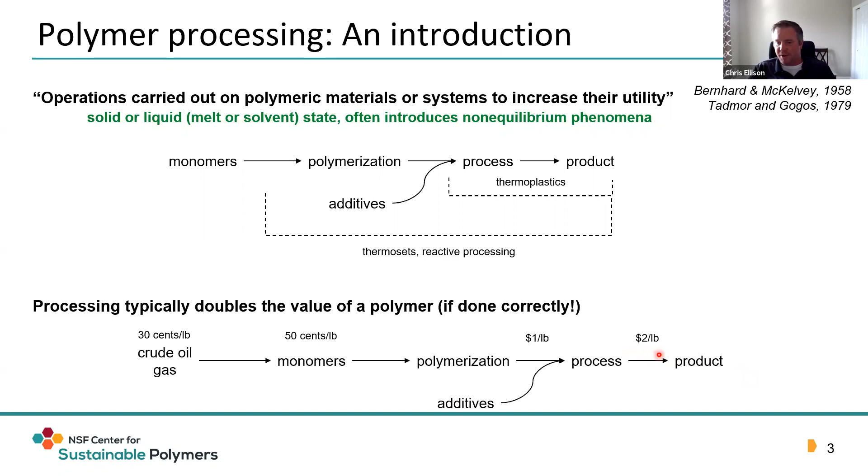Below, I'm just showing the flow from cradle to grave, so to speak, or crude oil and gas entering at the beginning. Of course, in the Center for Sustainable Polymers, we hope that would be biomass or sustainable materials, and then finishing at product. You can see it goes from $1 a pound to $2 a pound by way of the process. The process can be pretty complicated.

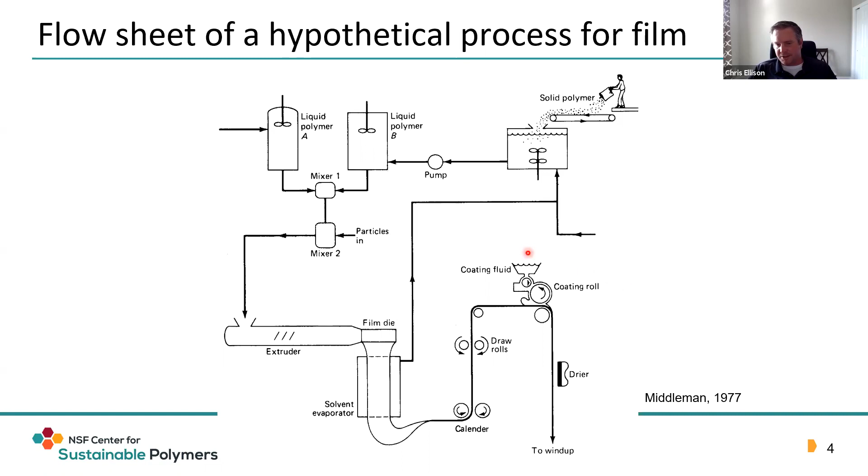Here I'm just showing a flow sheet of a hypothetical process for film. Really the only takeaway I'd like you to have here is that the process is more complicated than the single units that we'll show you today, and you really need to think about it in terms of all the unit operations. Here I'm showing a film process just as an example. Okay, next slide.

Polymers are anisotropic, and so this is typically exploited through processing. Because they're long chain molecules and have covalent bonds, they can be aligned in the flow, and that alignment in the flow can impart unique properties that can compete with more conventional materials.

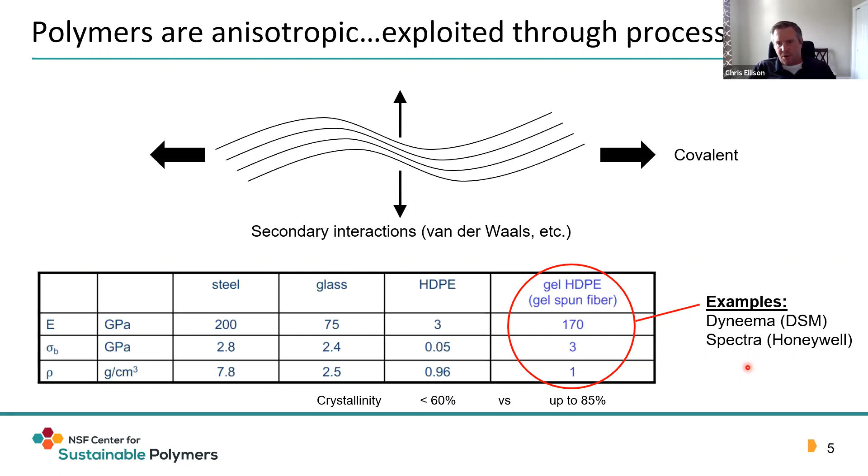However, if you process it by gel spun fiber process, you can actually make fibers that are competitive with steel, but have almost 8 times lower density. This is a result of alignment of polymer chains. It's sold as several different commercial products, one by DSM called Dyneema, and the other by Honeywell called Spectra. So the role of the material in the process is actually quite important in defining the final properties.

One of the ways you might think about how materials are intertwined with the process is to think about relevant timescales. Of course, materials have intrinsic material timescales. These might be related to things like the relaxation time, or the crystallization kinetics. And these are dictated by things like molecular weight distribution, branches, physical aging, et cetera.

But you have to think about those material timescales and how they work with the process, which come from the mechanical history, the flow intensity timescale, which can be different depending on the process you're using, and then also the thermal history. Thermal history in particular is important by way of how quench rates may control internal stress in the system, or the crystallization kinetics, and ultimately the crystal content.

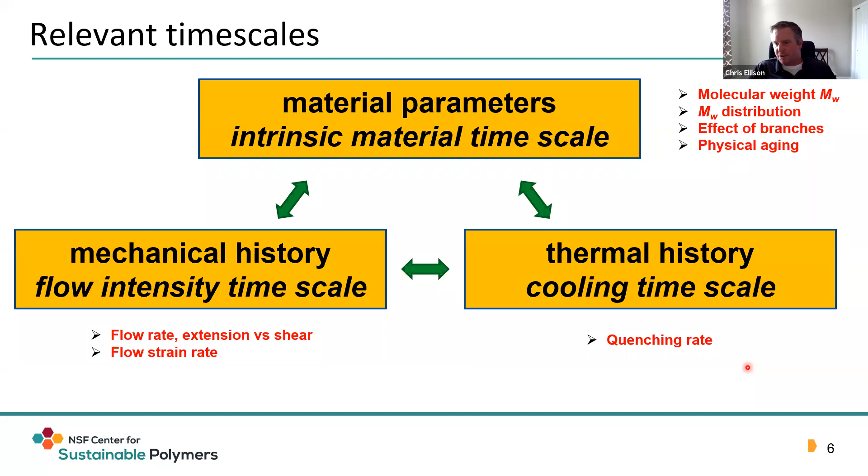So these 3 timescales are really important. Just to show a few examples of this, I'd like to focus on the rate of flow and how it can affect the way in which a material behaves.

I'd just like to point out that measuring the rheology or the viscosity of these systems over such a wide shear rate range typically requires using several different types of rheometers: rotational rheometry at low shear rates, and then capillary rheometry at high shear rates. So rate of flow matters substantially.

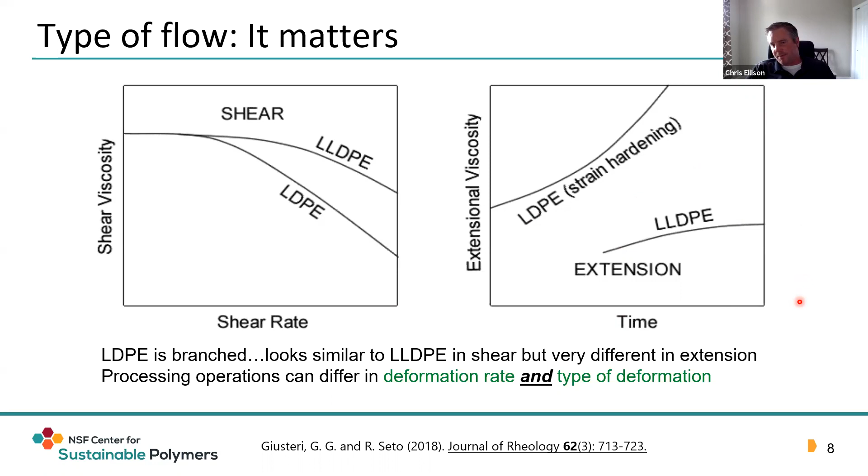However, if you look at the extensional viscosity, which is a different type of flow, the LLDPE doesn't exhibit much extensional strain hardening, while LDPE strain hardens substantially. The reason for this is LDPE is highly branched. It looks similar to LLDPE in shear, but it's very different in extension. And this all comes from 2 polymers that are essentially all carbon and hydrogen.

So keep in mind that processing operations can differ in both deformation rate and the type of deformation. Here's an example where both the type of deformation and deformation rate differ in a single process. It's not as if you take one process and it has one type of shear and one type of shear rate. It can actually exhibit multiple types.

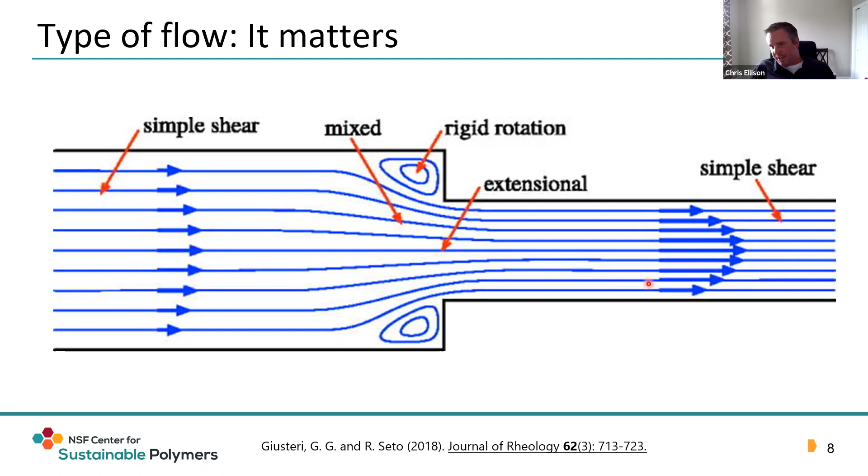This shows the streamlines of the fluid, a polymer melt let's say, and the size of the arrows indicates the velocity of the flow. Essentially you have a large tube going to a small tube. Where this contraction happens, there's a significant amount of extensional flow or mixed shear and extensional flow. Whereas at both ends of this picture, you typically just have simple shear and roughly parabolic velocity profiles. So this is a very simple flow, but it has a very complicated type of shear rate and type of deformation.

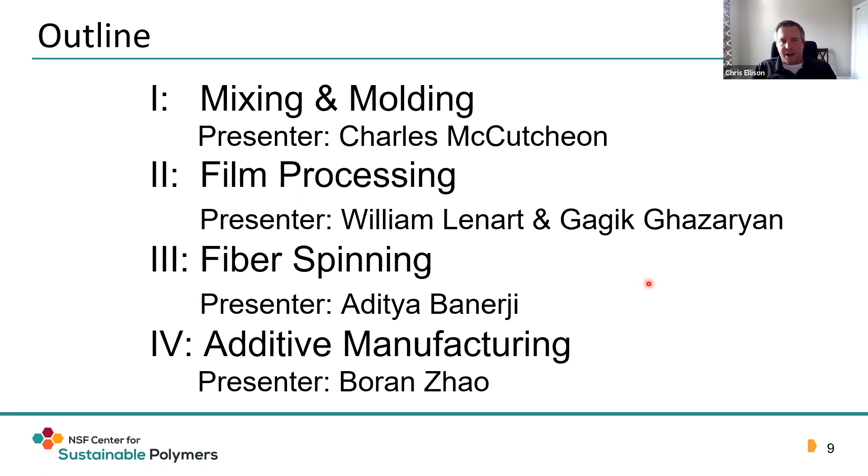One more thing I'd like to address at the beginning is that for all the mixers we will discuss, they can be used to mix polymer additive and polymer filler type blends.

Since this is a batch process, one disadvantage is that the material after mixing is a little difficult to recover.

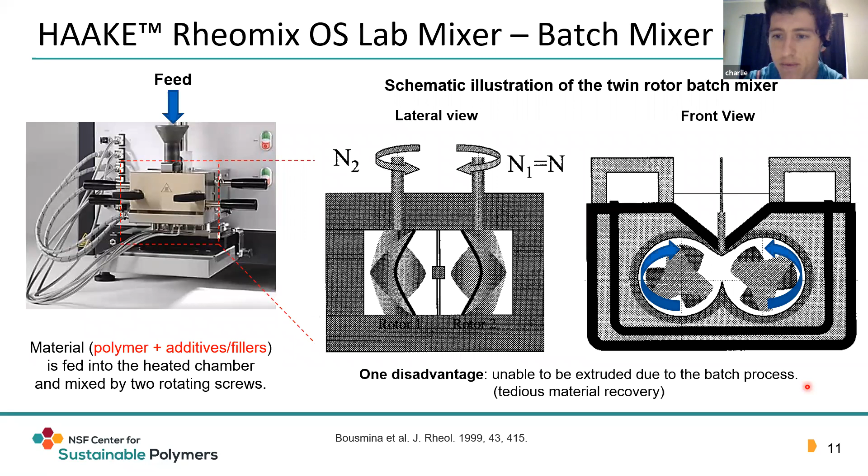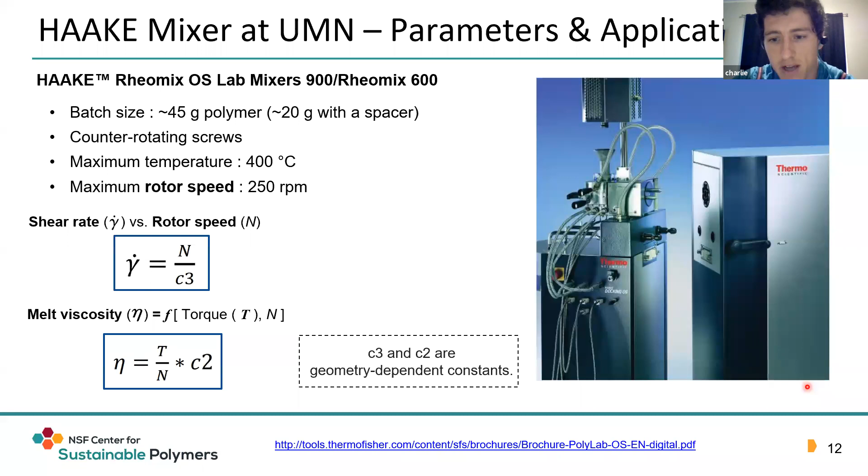The specific HAAKE mixer we have at the U of M is a HAAKE Rheomix OS Lab Mixer 900. The batch size is about 45 grams, or you can do a smaller batch size of about 20 grams with a spacer. You can do in situ measurements while mixing, such as the shear rate, which is proportional to the rotor speed, and the melt viscosity, which can be measured from the torque and rotor speed.

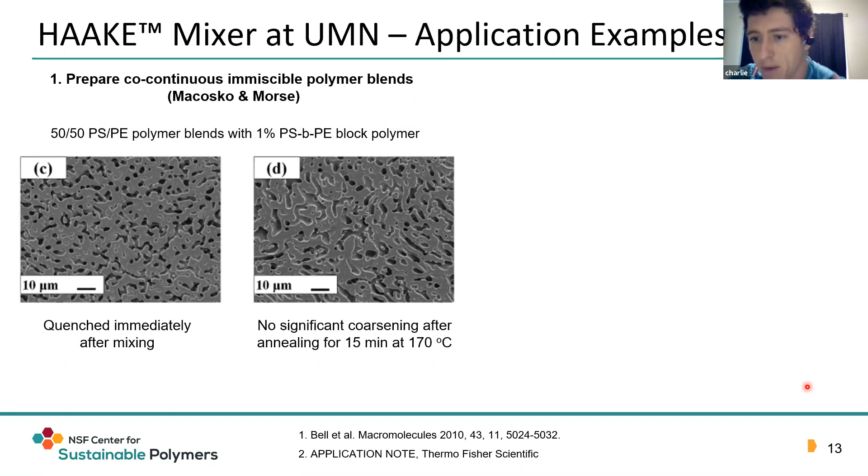An example of research that used the HAAKE at the U of M was done by the Macosko and Morse group, who used it to prepare polymer blends, co-continuous blends specifically. They added a block copolymer which stabilized the blend, and you can see the results here.

Another example with the HAAKE mixer is using a proper attachment, when we don't currently have one purchased, to measure other properties in situ during melt mixing. Here we measured the electrical conductivity, which is monitored by the addition of carbon black to make a composite, as one example.

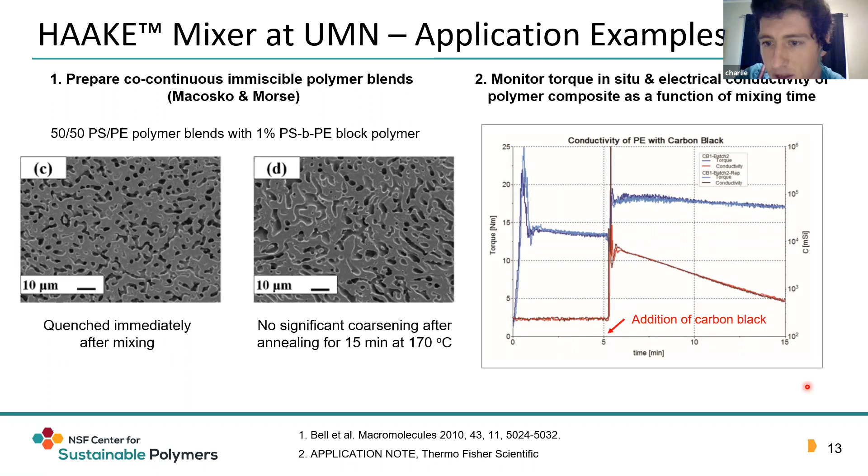Next we'll talk about the twin screw extruder, which is a continuous mixer, while the HAAKE was a batch mixer. Again you have a feed for polymer, fillers, and additives, then an extruder, a heating block, a die, and once the filament comes out of the die, it can then be pelletized if you would like.

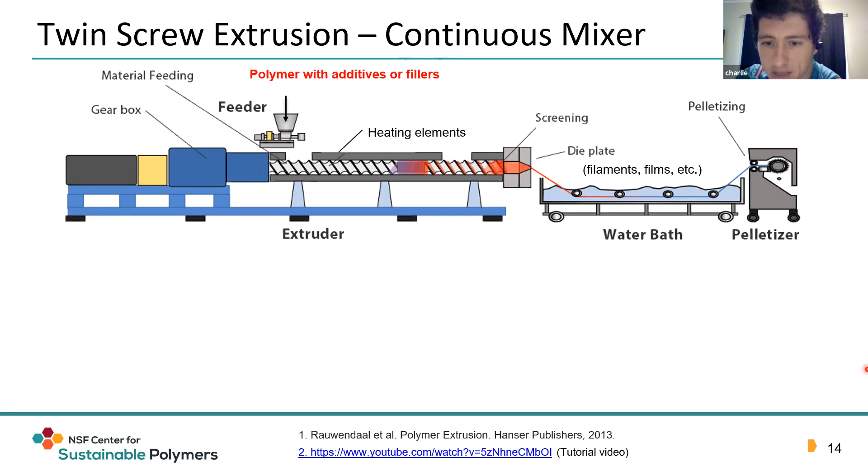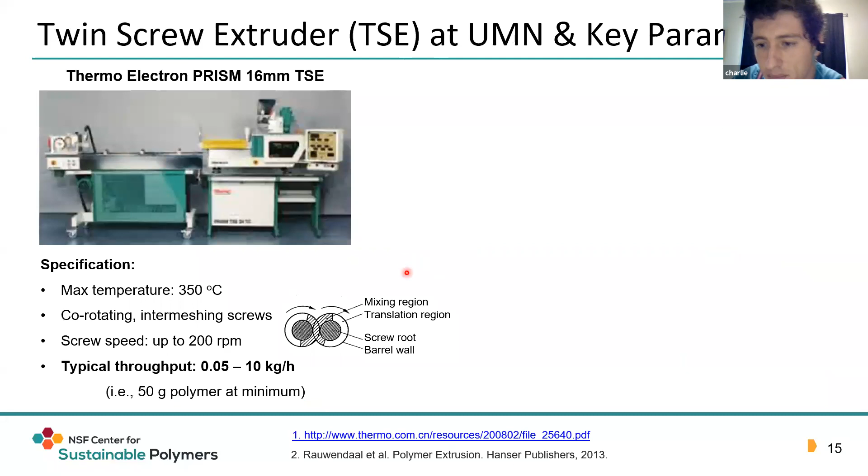The specific twin screw extruder we have at the U of M is a PRISM 16 millimeter. It has co-rotating screws, and the screw speeds can go up to about 200 RPM. The throughput is about 0.05 to 10 kilograms per hour. A disadvantage of a continuous mixer of this sort is that you need a minimum of about 50 grams of polymer, though this is an industrially relevant process that can produce blends very effectively at a large scale.

There are a lot of parameters involved with twin screw extrusion. Some setting parameters are screw speed, screw design, and barrel heating. Some process parameters are the pressure profile, the temperature profile, and residence time. I'd just like to reiterate that the process is complex and involves both shear and extensional flows.

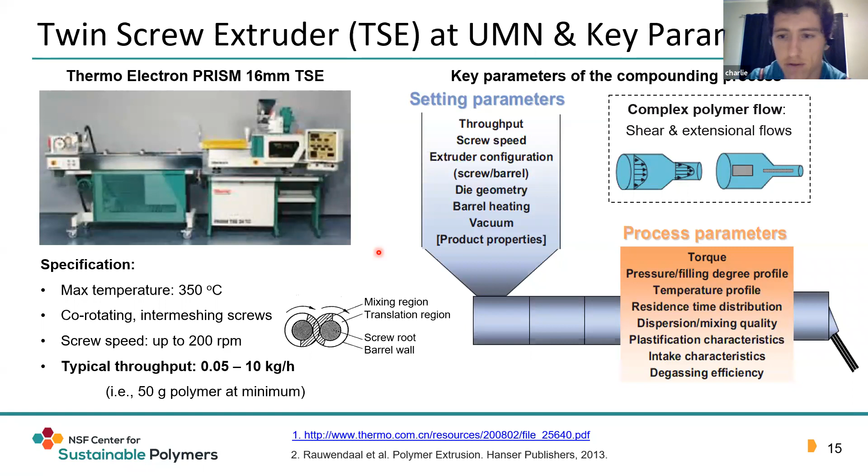Another example is PLA that has been fiber reinforced with cellulose nanofiber composite. As you increase the cellulose nanofiber loading, the modulus increases.

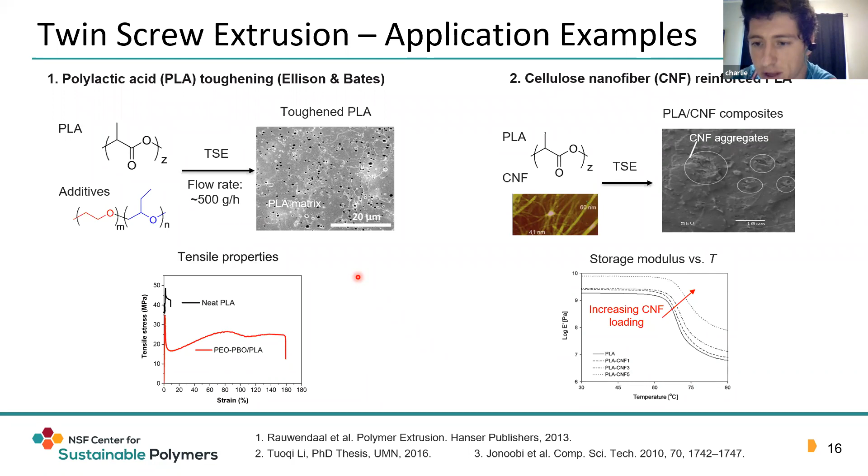So I've shown you both a batch process and a continuous process. Now I'll show you a process that can do both, the microcompounder. This is a lab scale version of the twin screw extruder, the previous mixer you just saw, and it can reach similar shear rates and does similar mixing, but is used for small sample sizes.

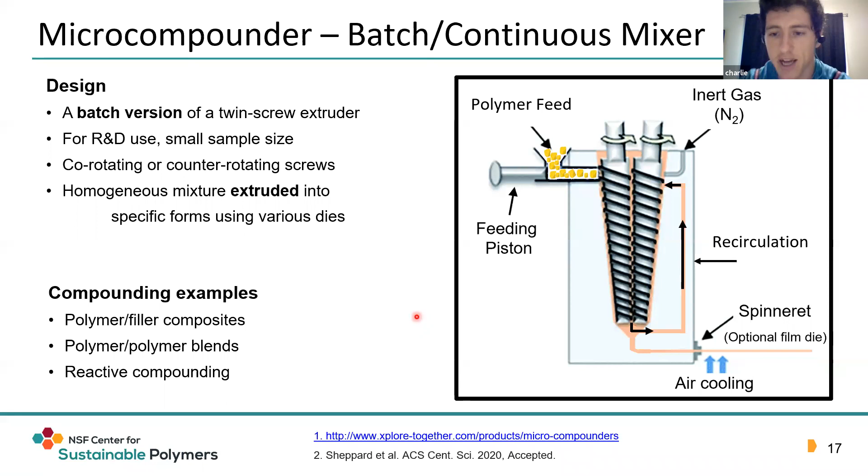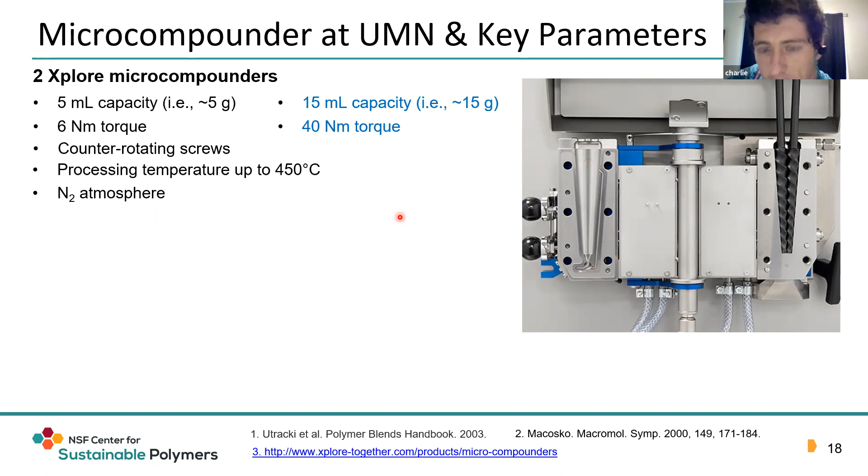At the UMN, we have two different microcompounders, one with a 5 milliliter capacity and the other with a 15 milliliter capacity. The ones we have are counter-rotating screws, and both have the ability to have a nitrogen atmosphere for an inert environment.

Some key processing parameters you can tune are temperature and screw speed. The screw speed can be converted to the shear rate through an equation, and the melt viscosity can be measured through the force and torque. In situ measurements can be recorded while mixing.

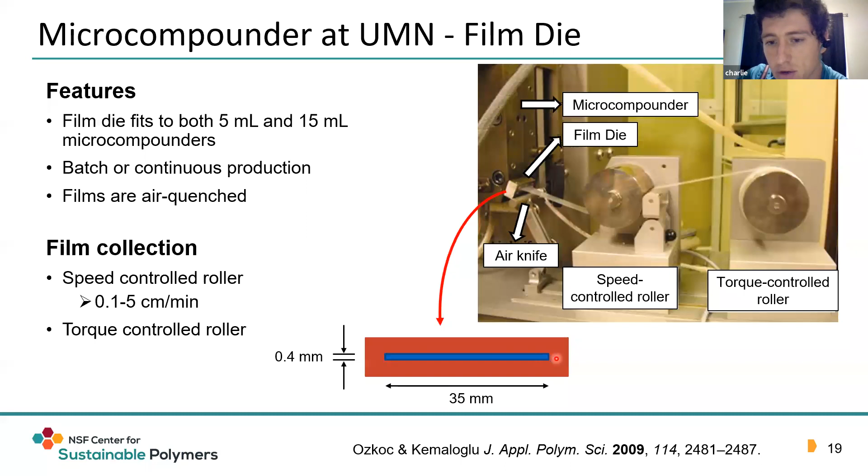Examples of microcompounding from the U of M: the first is from the Lodge and Macosko group, where a batch process was used. They used reactive compatibilization of polyethylene and PLA blends, adding a catalyst. Because the catalyst was added, a reaction happened at the interface of the two polymers and formed block copolymers to reduce the interfacial tension, so you could see the dispersion size decreased.

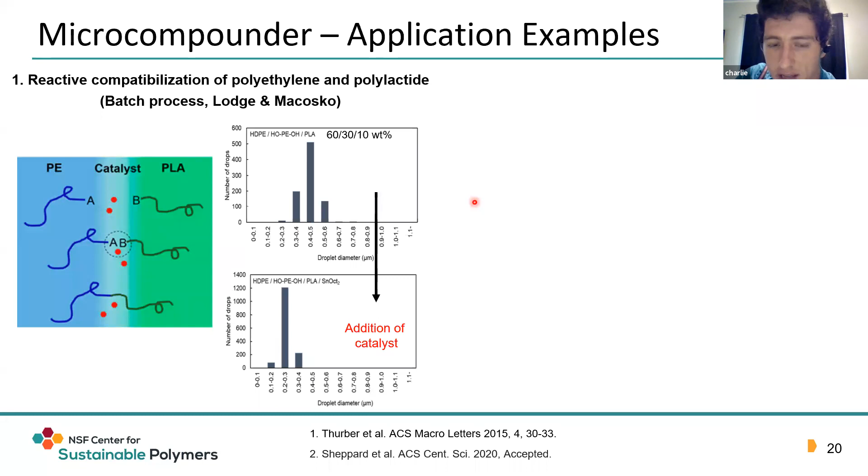A more recent example, from the CSP, is a continuous process for polyurethane foams. The microcompounder proved to be an effective way to enhance the carbamate exchange in situ, turning cross-linked polyurethane foam waste into reprocessed films.

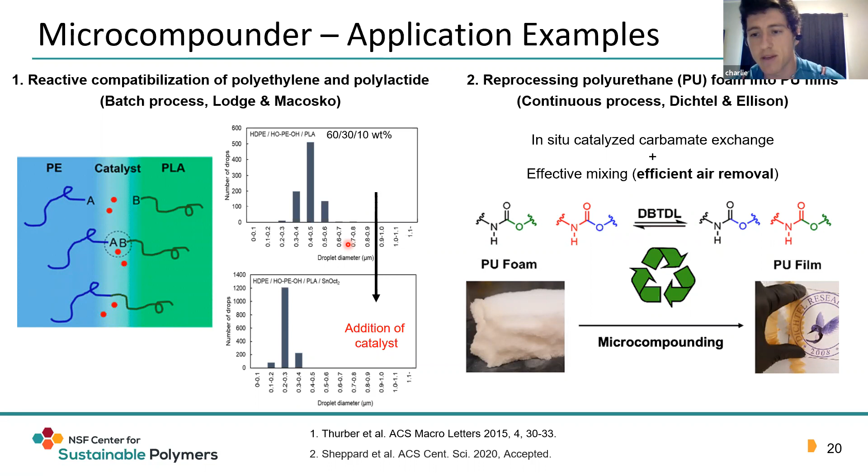Now moving to the molding part, before we talked about mixing. The previous processing equipment was associated with mixing and extrusion, and this is the injection molder, which takes those mixed polymers and makes final products. Polymer is fed into the hopper, and there's a heated barrel through which the material is pushed with a piston, and it will be filled into a mold.

This process is used for high throughput of the same part, and you get very tight tolerances. One material made this way is Legos. One disadvantage is that you need to machine a mold, which could take time and is also expensive to make.

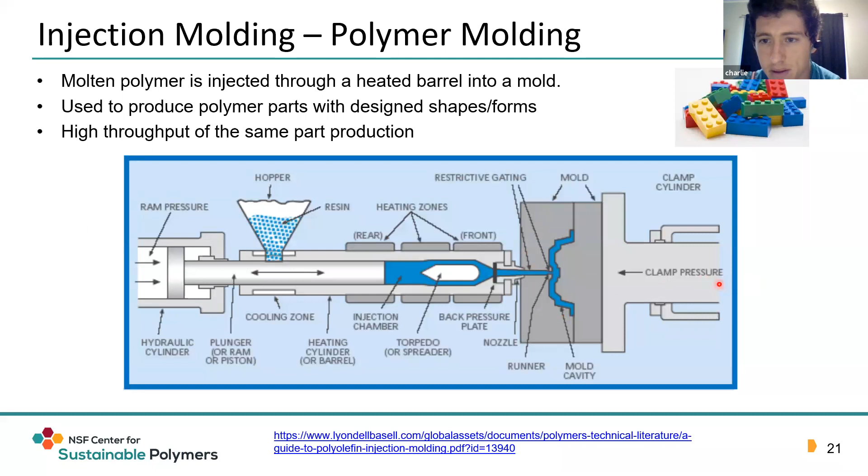Key parameters for the injection molder are the temperature and pressure. If you don't have the right temperature and pressure, you're going to either overfill your mold or underfill your mold, and you won't have the proper product.

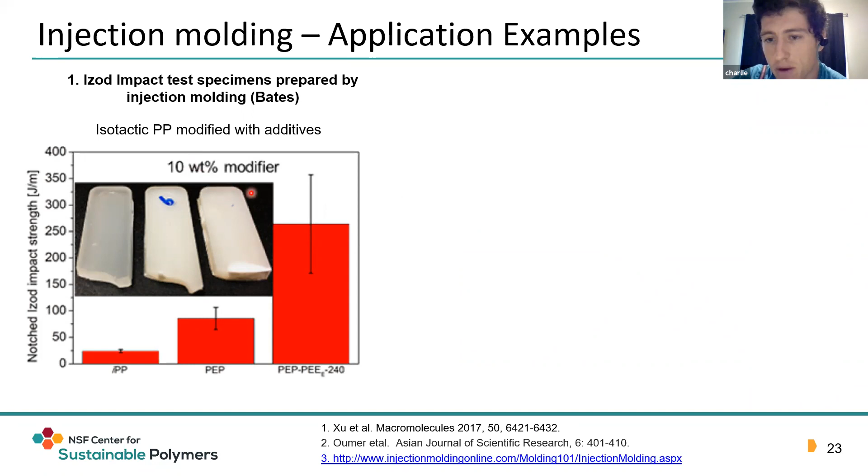At the U of M, two particular molds we have are a tensile bar and an impact test specimen. One example of using the impact test specimen was in the Bates group. They injection molded IZOD impact test bars, which were iPP toughened with block copolymer, and they were able to test all these impact bars in a very efficient manner.

Another thing injection molding is used for is to study the effect of chain alignment of fillers and the chains themselves, and see how it impacts the material properties.

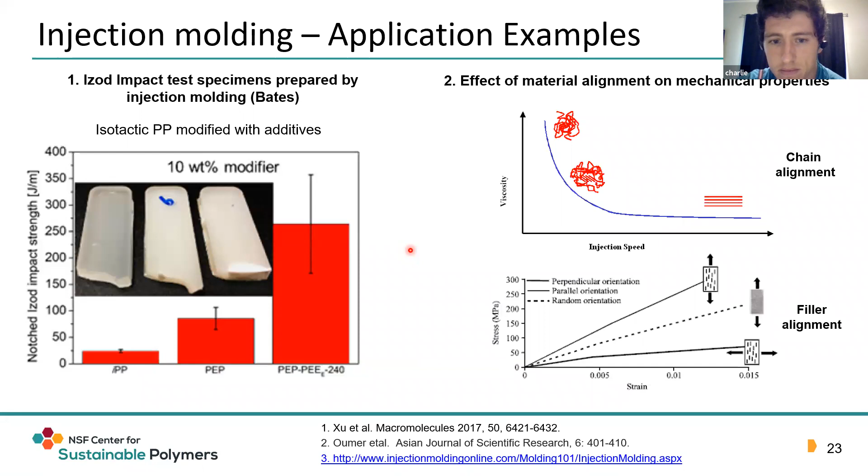All right, great, thank you. My name is William Leonard, I go by Bill. I'm a recent postdoc with the Ellison Group. I started with them just before everything started shutting down. So it's great to be here with you all to talk about some film processing.

Often when you create a material, you want to characterize it in the solid state, and frequently you want to make it into a film. One of the easiest ways is to dissolve it in a compatible solvent and then spin coat it, using a high-speed rotating substrate, so the solvent evaporates, leaving behind your polymer film. What's helpful is that it's pretty easy to tune the height of your film from independent variables based on your solution's viscosity and how fast you're rotating. One unique capability we have here is high temperature spin coating, which allows us to make polyolefin films or liquid crystal polymer thin films as well.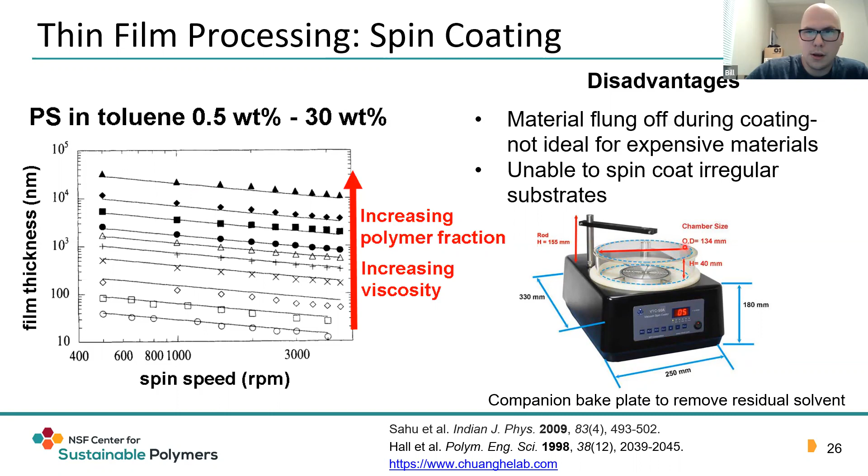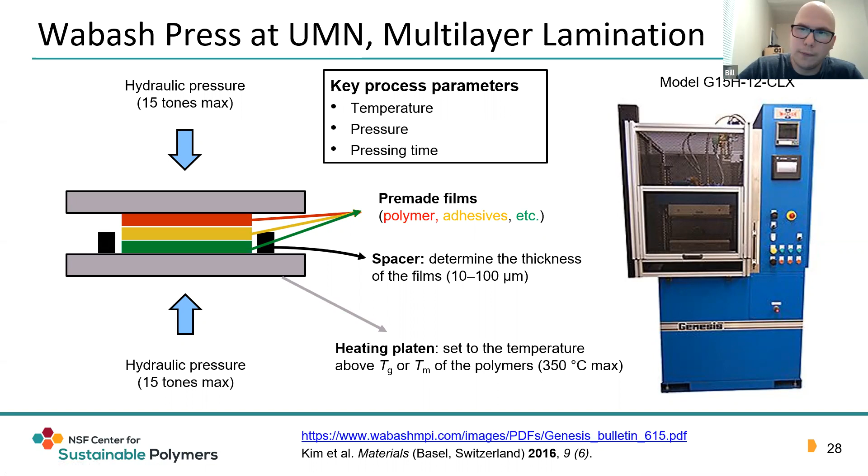What you can further do is, if you have pre-made films, either from spin coating or from pressing them previously with the compression molder, you can laminate films and look at adhesive properties, diffusion between the layers, or other interactions at the interface that you might find interesting. Again, the same controlling parameters are temperature, pressure, and pressing time, and you want to consider the TG or TM of the materials you're working with to derive what process parameters you want to use.

A specific example of what's been done here is the use of a block copolymer to act as a tie layer between two incompatible polymers, where we see a substantial increase in adhesion between the two phases with the inclusion of the block copolymer, which entangles with both phases and ties them together.

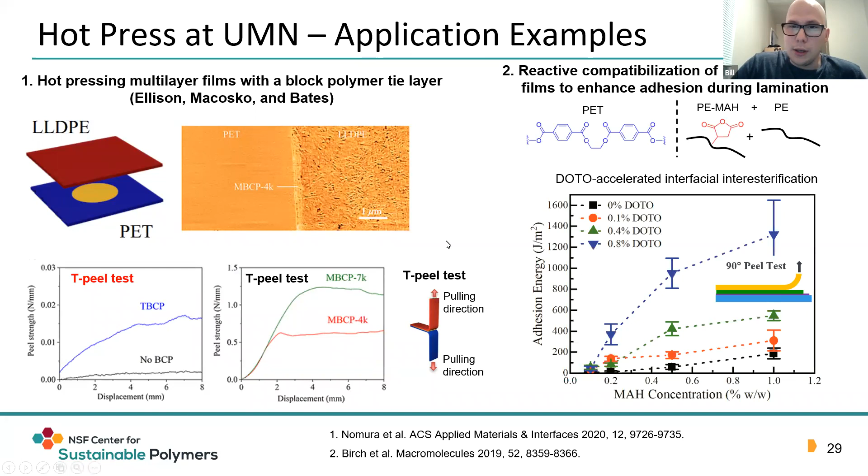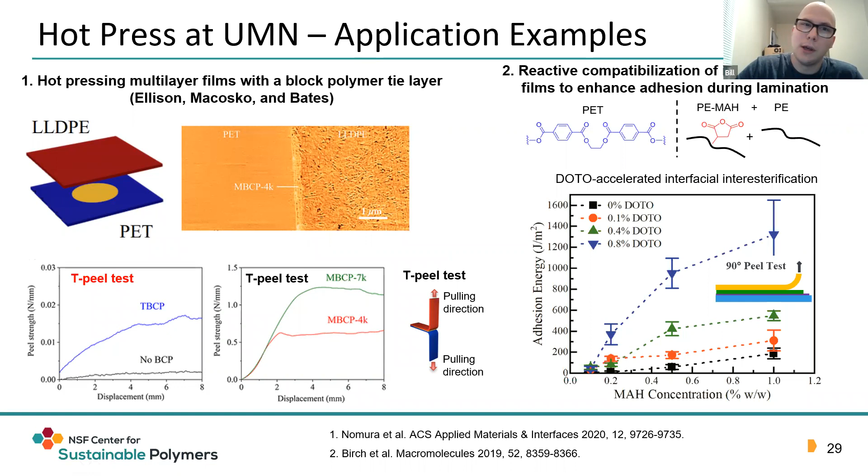Additionally, looking at reactive compatibilization: the diffusion of the two phases causes the reactive groups on each polymer to interact, and you get adhesion as well without needing to include a third phase, such as the block copolymers previously. So it's an in situ method to compatibilize two incompatible materials.

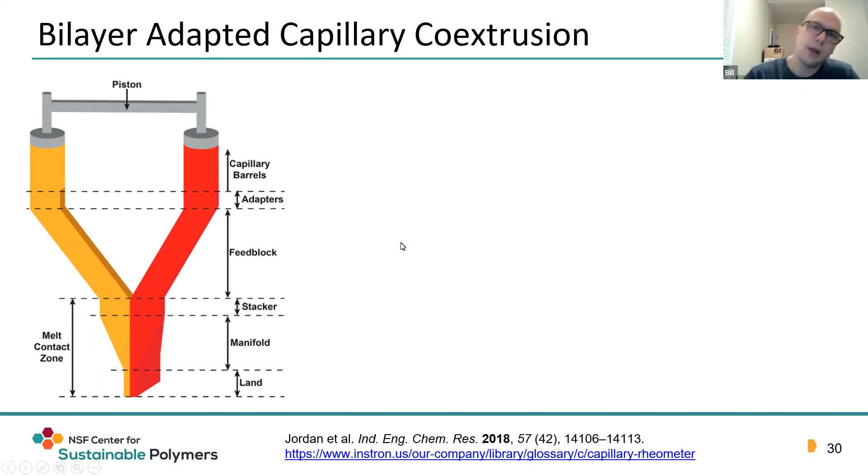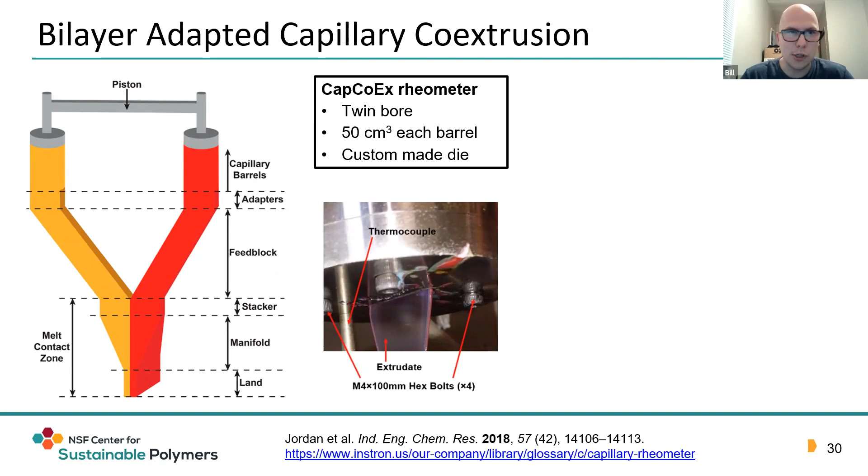Another way to make thin films, specifically a bilayer system, is the use of our capillary rheometer with two barrels that allows you to co-extrude two polymer melts together, where the limitation is that each bore must be at the same temperature and piston speed. So you do have some limitations there that will alter your melt contact time a little bit. We're able to access a fairly wide range of interface contact times to examine in situ reactions, or if you're interested in localization at the interface, this might be a good small scale method for you as well.

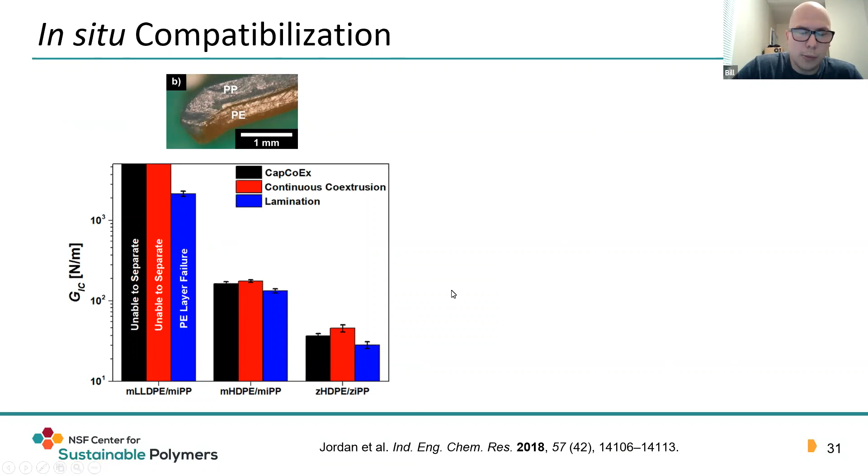Some things that have been done here include in situ compatibilization, where we've examined the effects of the polymerization type of the polyolefin and how they interdiffuse with each other, and also reactive compatibilization, showing improved adhesion with increased contact time, allowing you to better understand scaled-up process parameters.

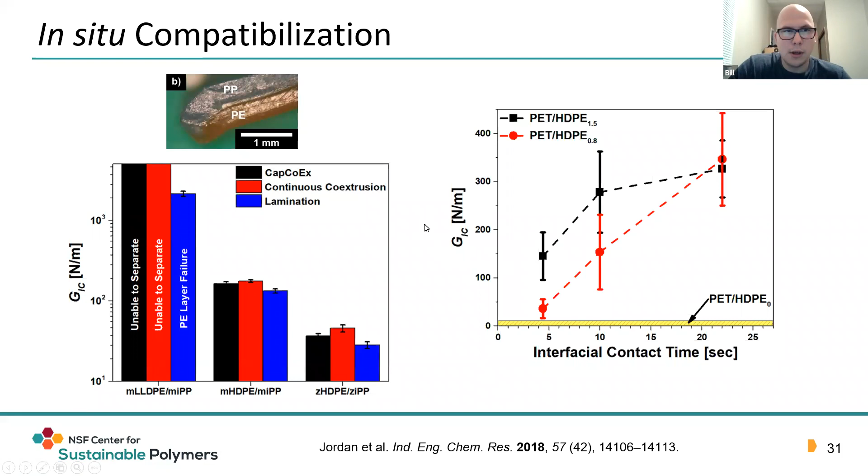Another step up from that, if you're looking for a higher number of layers or interfaces, is multi-layer co-extrusion. This is a much larger scale. Each extruder needs about 500 grams, and it has a fair amount of flexibility beyond that.

You can control your number of layers either from the onset at the feed block with the addition of layer multipliers, and then you can control your film size and thickness with your takeoff, your exit die, and any other post-processing you might be interested in.

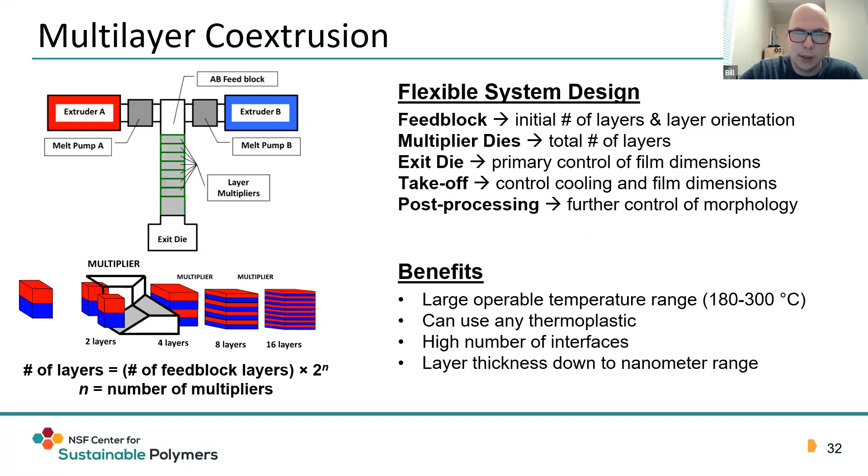Next, some of the special design considerations here is the combination of the high shear and layer confinement that allows you to get this forced assembly. For example, in a block copolymer system, alignment of a cylinder phase with the extrusion direction.

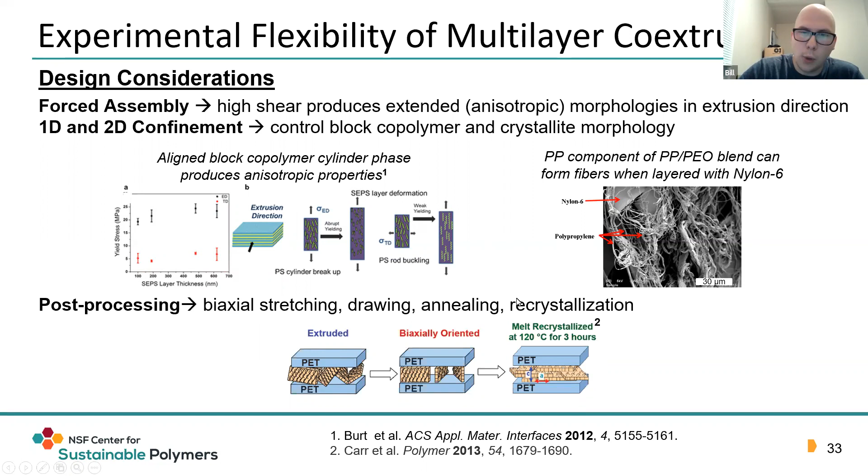In a blended phase of polypropylene and polyethylene oxide, you can actually get the polypropylene to form a continuous fiber-forming phase. Further processing can be done on these systems to control the morphology with confinement effects beyond that, giving you a 2D confinement instead of the 1D confinement you typically see from spin coating.

Additionally, you can add a variety of additives to the system. Going back to that previous work, you could add block copolymers as an alternative route for recycling. You could include dyes, which have been used for 3D optical data storage.

Really, the only restrictions on the process are that you want your system to be in this viscosity range between 10 and 100 kilopascal seconds at this shear rate. That gives you good layer integrity if your viscosities are within 2 times of each other, giving consistent layer thickness throughout your whole system. But then again, you do have a high sample requirement here.

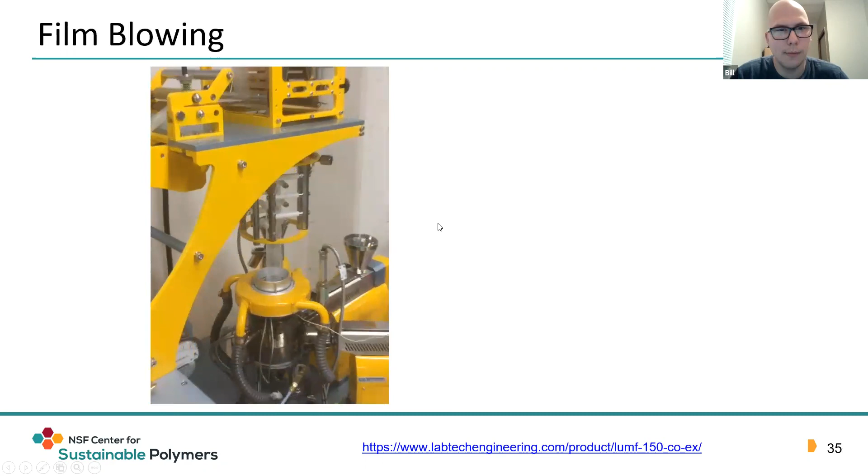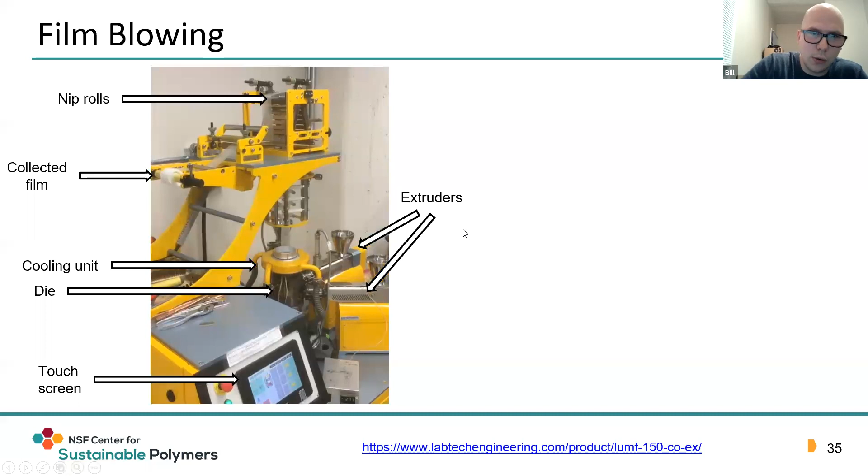The last, more unique system we have is this small-scale film blowing system. This works on a similar capacity as the multi-layer co-extrusion, about 500 grams per extruder. We're able to have 3 extruders here, so we can layer 3 polymers together, either as a tie layer for compatibilizing or adhering incompatible polymer systems together.

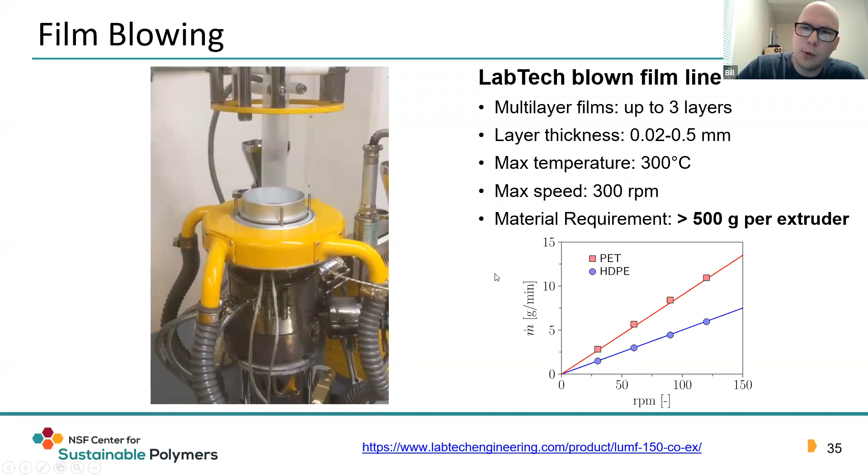You can look at the effects of blow up on your system, and we have pretty good control over the relationship between the flow rate and the operating speeds of the equipment.

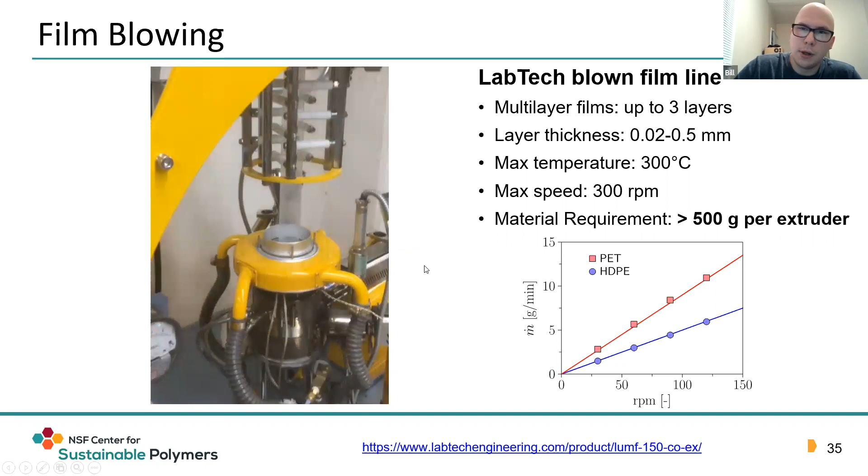Some of the applications commonly used for fibers include disposable hygiene and medical products. For example, in this current COVID outbreak, you would have seen so much demand for N95 masks. The main material of the N95 mask is basically a non-woven mesh of polypropylene.

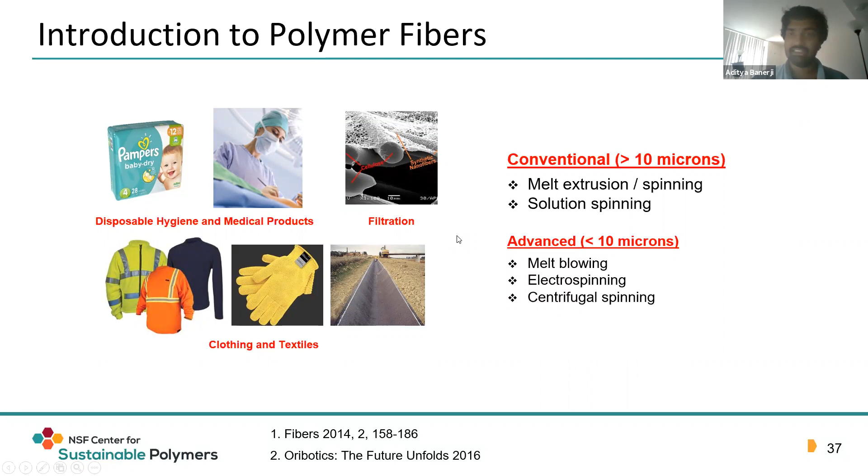For example, high velocity air jets in melt blowing and electric fields in electrospinning lead to much higher stretching of the fiber filaments, resulting in much smaller diameters. From a viscoelastic point of view, advanced methods typically involve much lower viscosity and elastic properties, leading to those particular diameter ranges.

So the two processes I would be focusing on are melt blowing and electrospinning. Melt blowing has been commonly used in industry for about half a century now. It operates by the polymer being fed through a hopper at the top.

Once it passes through the die, it is melted at high temperature above its glass transition or melting temperature, extruded through the die tip, and hot air jets, marked by the red arrows, stretch them out into thin filaments, leading to further thinning and reduction in diameter. During flight it cools below its solidification temperature and is subsequently collected below in the rotating drum.

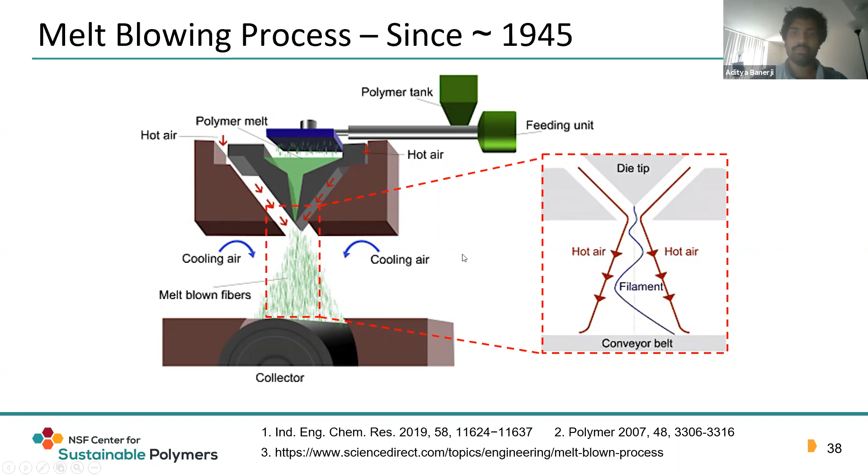The inset on the right basically highlights the mechanism by which this particular process is happening.

Some common feedstocks, like in the case of N95 masks, are polypropylene and polybutylene terephthalate, which provide a high melting temperature, giving the upper ceiling temperature up to which that particular polymer fiber is stable. Typical melt blowing temperatures range about 200 to 350 Celsius, while viscosity ranges about 20 to 200 Pascal seconds for optimum performance.

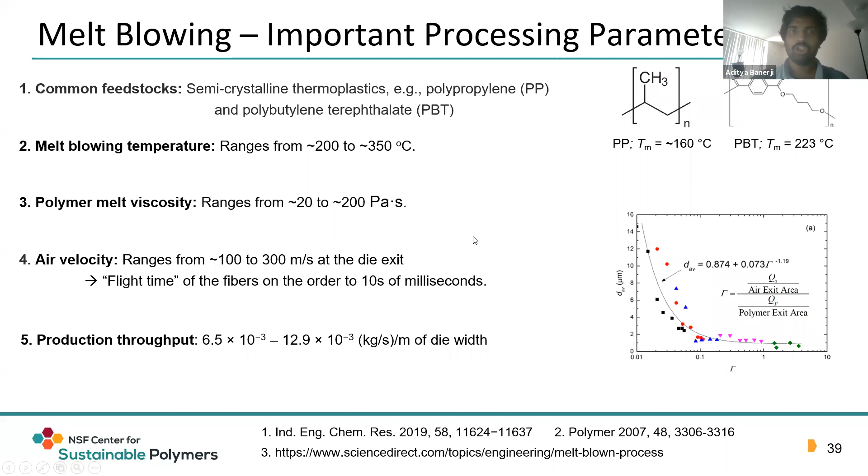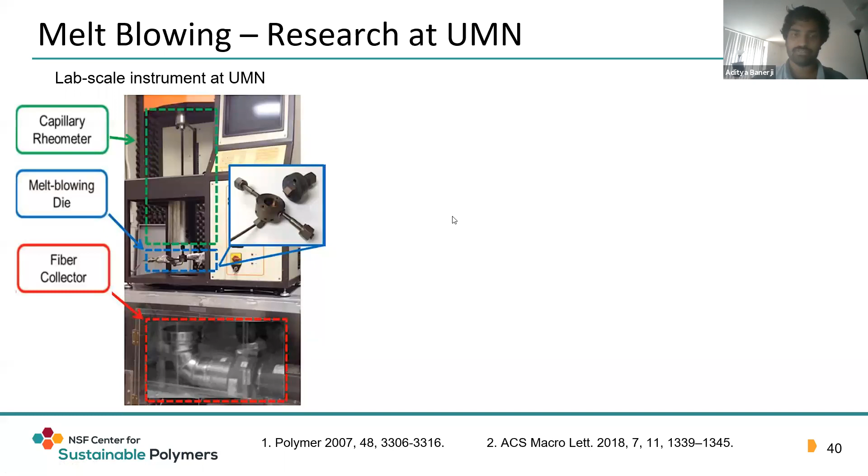The capillary rheometer serves the purpose of pushing the polymer melt through the melt blowing die, which then gets drawn down into small, thin fibers, collected in the bottom section.

A couple of research areas studied at UMN include the first one, in which polypropylene was used to produce nanofibers by fine-tuning certain processing parameters like the viscoelastic properties, the polymer delivery rates, and so on.

The highlight of this particular work was that since you can attain nanofibers, this opens up a large application area in which high specific surface areas are key for success.

In addition, a recent paper highlighted the fact that using a polymer functionalized with a thermoreversible Diels-Alder network can provide a method to get recyclable cross-linked fibers, which also leads to a sustainable aspect of this particular technique.

In comparison, in electrospinning, in contrast to polymer melt, polymer solutions are used, which are drawn into thin fiber jets using a strong electric field in the range of about 10 to 50 kilovolts or so.

Due to the high stretching force available, the typical fiber diameters are in the range of 1 micron or even lower, into the nanometer scale.

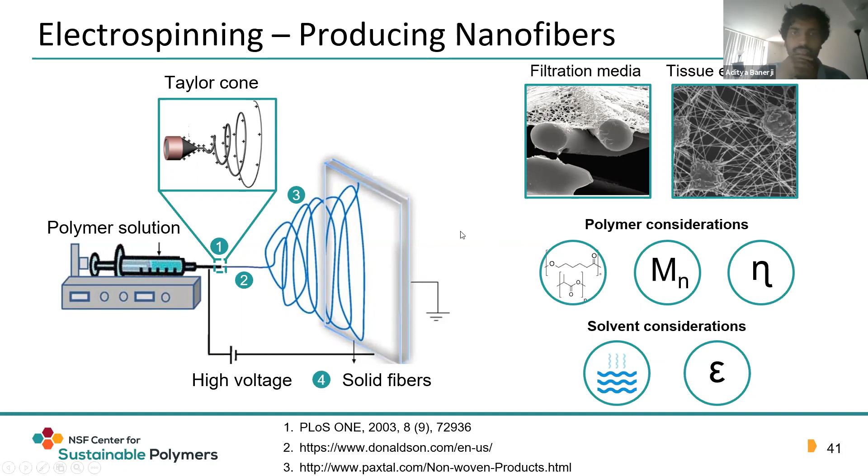Moving on, the current research in our group has focused on modifying these melt blowing and electrospinning methods through what we call UV cure blowing and UV electrospinning.

What sets these apart from conventional processes is that instead of a polymer melt or polymer solution, we use a reactive monomer mixture, for example comprising thiol-acrylate monomers, thiol-allyl ether, or other thiol-ene monomers, that are extruded through a die and then drawn by air jets or electric field in both cases.

And while in flight, upon shining UV light on them, there's a rapid cross-linking that occurs, which leads to formation of a cross-linked network within the fiber mat, which is collected. This also gives the additional benefit that you can get a cross-linked fiber mat at the end of this particular process.

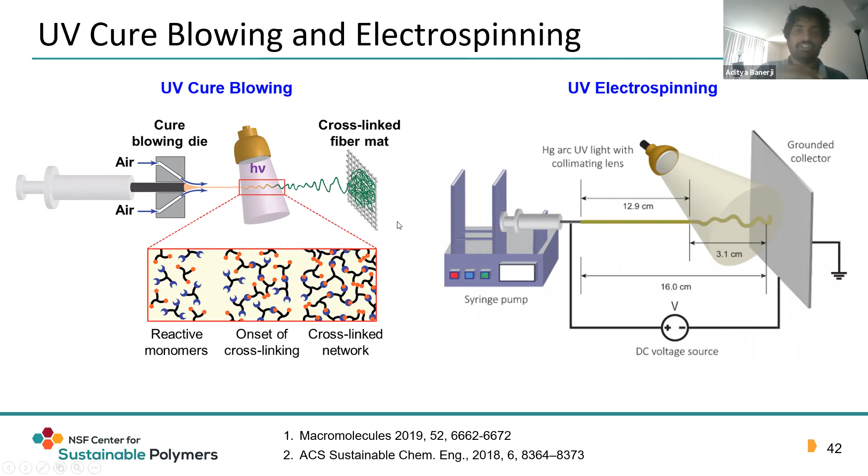In the next slide, I'll show a couple of videos of the UV cure blowing setup we have at UMN in action. Through the syringe on the left, the reactive monomers are extruded to the die, and during flight, upon shining UV light, they cross-link and are collected downstream. The video on the right is high-speed photography of the fiber attenuation process, where high-speed air impinging on it from the top and bottom slits leads to progressive thinning of the fiber jets.

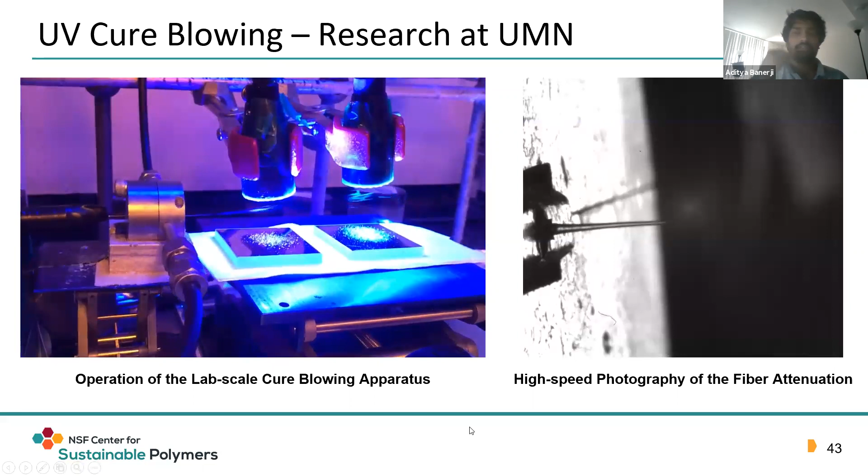In this last section of today's presentation, I will shed some light on additive manufacturing, or 3D printing. Before I go on, I'd like to thank my colleagues listed here for their help in putting together this section.

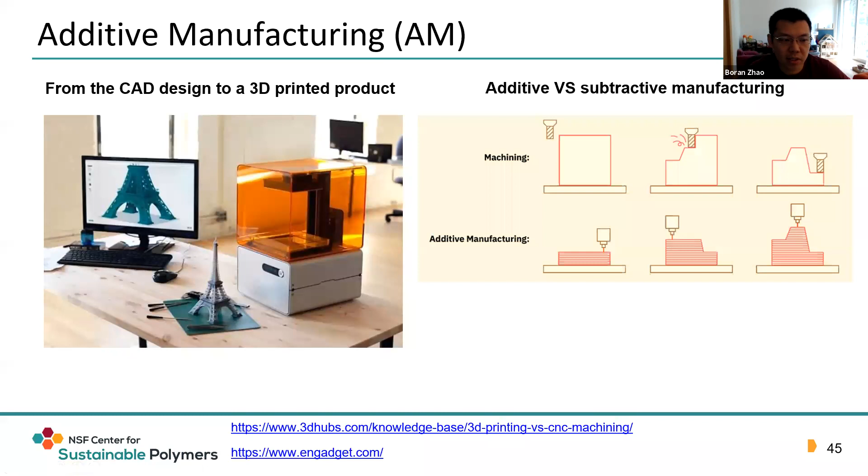The essence of additive manufacturing, or 3D printing, is to translate virtual 3D models from a computer into physical objects. Compared to traditional material processing, 3D printing doesn't require extensive machining or molding, and oftentimes it will greatly reduce the lead time in industry.

As new 3D printing techniques and new materials come out each year, with improved hardware and software, we will see this trend transform from rapid prototyping to rapid manufacturing.

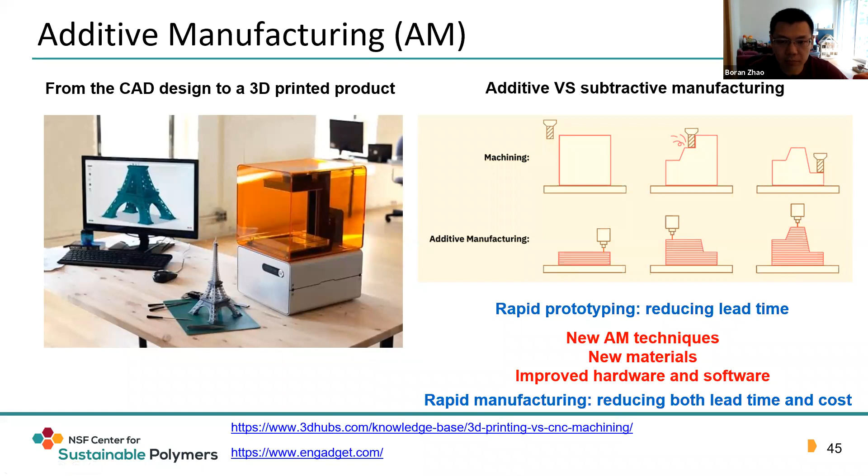Among 3D printing materials, polymeric material definitely plays a central role. Depending on what type of polymer you're interested in, there are different 3D printing methods that can process it. Today I will focus mainly on three of the most widely used 3D printing techniques.

The first is extrusion-based FDM. The second and third are photopolymerization-based: SLA and UV-DIW. In the next slides, I'll explain what they are, how they work, and give an example for each.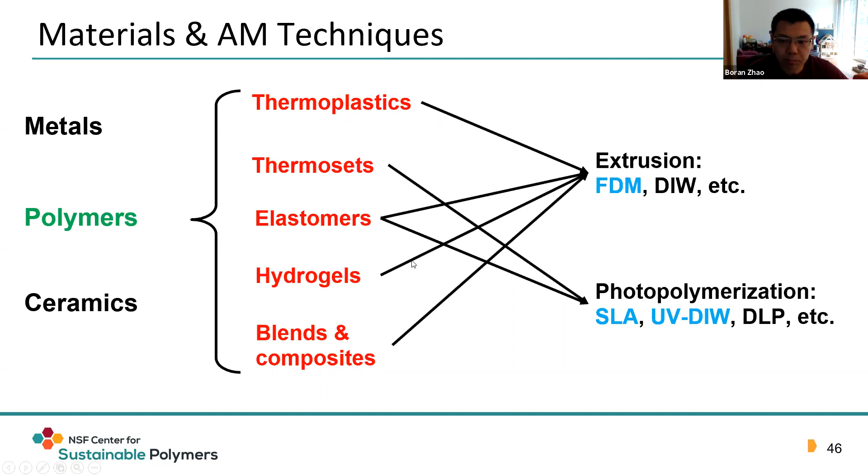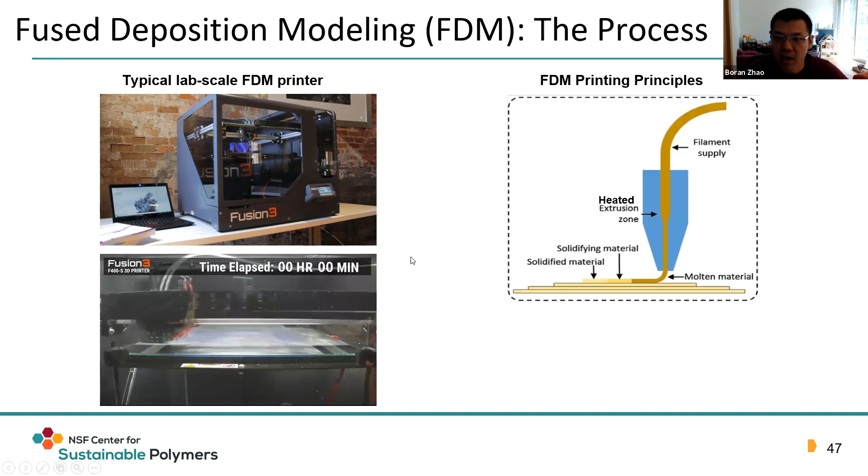The first technique is called fused deposition modeling. The picture on top shows a typical lab-scale FDM printer, and the video on the bottom shows a typical printing process. The principles behind FDM are pretty straightforward: we feed in our filament, it gets melted, extruded, and deposited on the build platform. Here we list some key parameters and dimensions/timescales related to FDM printing.

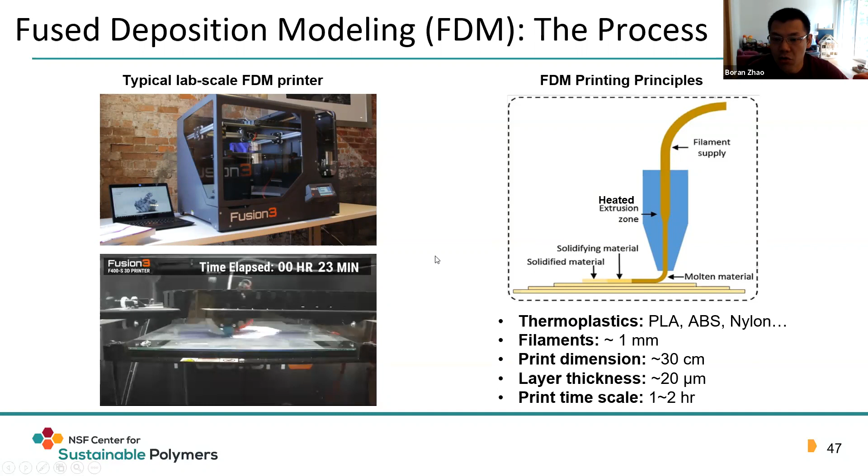Although there are many thermoplastic commercial filaments available to choose from, such as PLA, ABS, or nylon, you can also make your own filament. In the next slides, I'll give an example of making a customized filament at UMN.

The goal here is to 3D print a scaffold as a cardiac patch using FDM. As shown in the video, we use a twin screw extruder to make the filament—the same extruder my colleague Charlie talked about earlier.

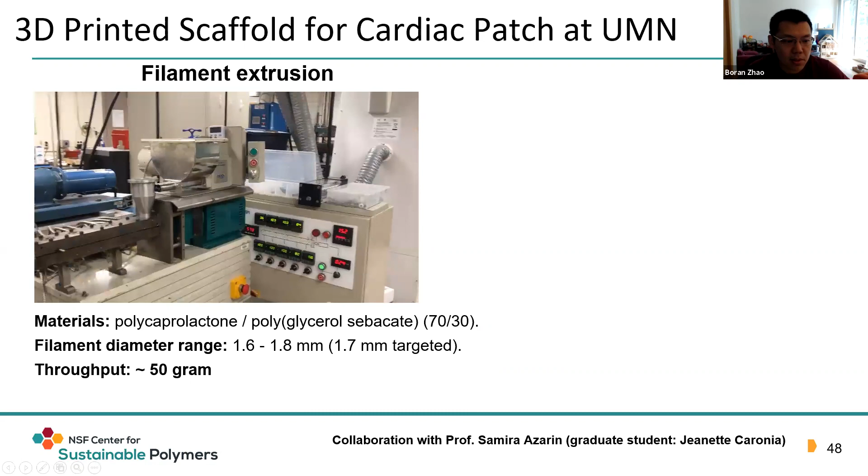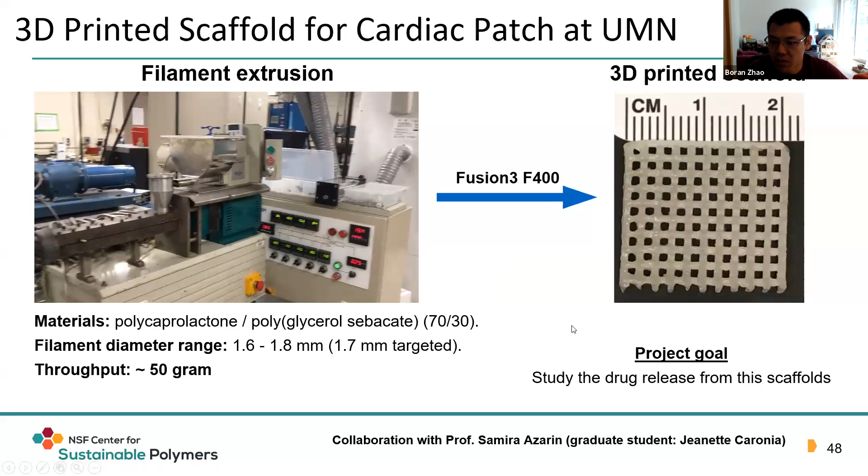This material is a binary polymer blend, and we target the filament diameter to be around 1.7 millimeters, which complies with the requirements of the 3D printer. As shown in the picture on the right, this is the final product. One thing we want to further develop is studying the drug release from this scaffold.

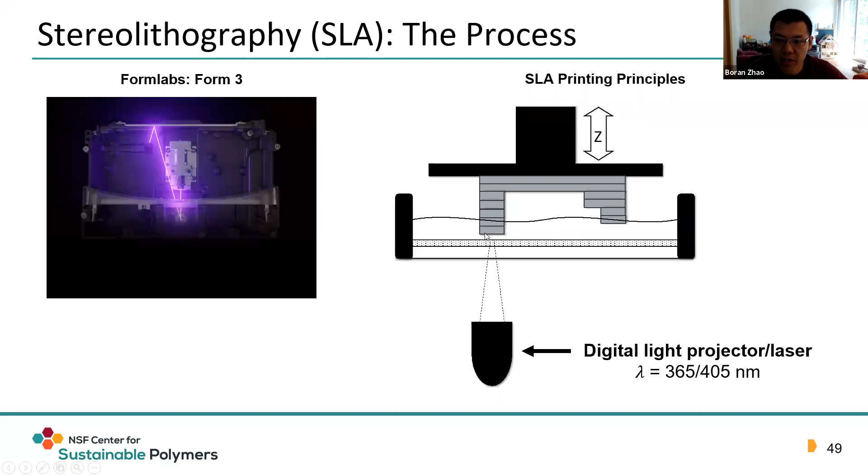The second technique I want to talk about is stereolithography, or SLA. As the video and picture show, SLA converts liquid resin into a cross-linked part by photopolymerization. It consists of three major parts: a light source, which could be either a digital light projector or a single-point laser; the vat, which holds the liquid polymer resin; and the moving build plate.

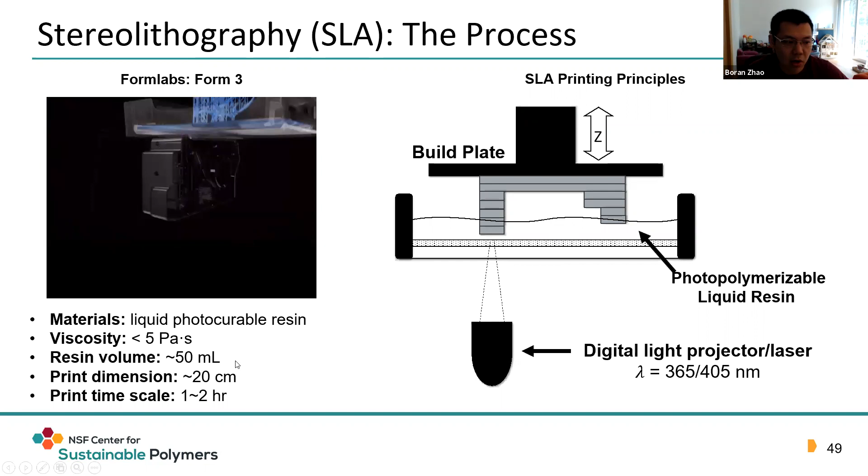Again, we list some of the print dimensions and timescales related to SLA printing. The novel liquid resin for the SLA process is definitely a focal point for research.

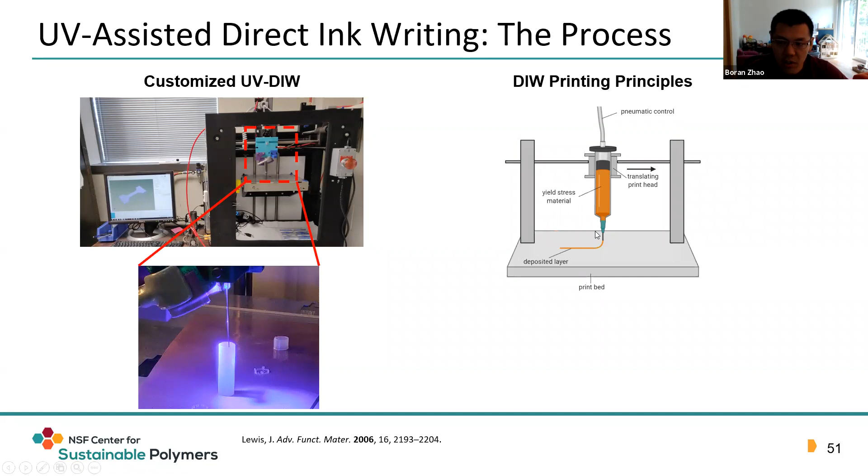Moving on to the last technique I'm going to talk about: UV-assisted direct ink writing. The printing principle looks a lot like a combination of an FDM printer and an SLA printer. Here is a picture of the printer in Professor Francis' lab. It's actually converted from an FDM printer with a UV light attachment added. The liquid resin is extruded onto the build plate and gets solidified either continuously or sequentially, so the resin needs a certain yield stress to prevent it from running away after deposition.

The materials are actually quite flexible. We can use colloidal suspensions, or we can use photocurable resins converted from SLA resin. There are plenty of ways of converting a conventional SLA resin to a DIW resin, for example, by adding a rheological modifier.

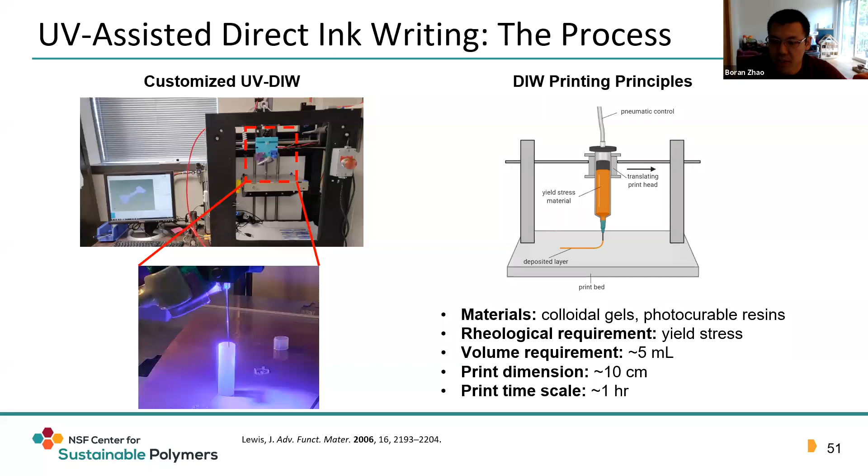Also, I want to point out that at the lab scale, we don't need a lot of materials. Usually we can generate a print using less than 5 milliliters, and the printing dimensions could be as large as 10 centimeters, finished within an hour.

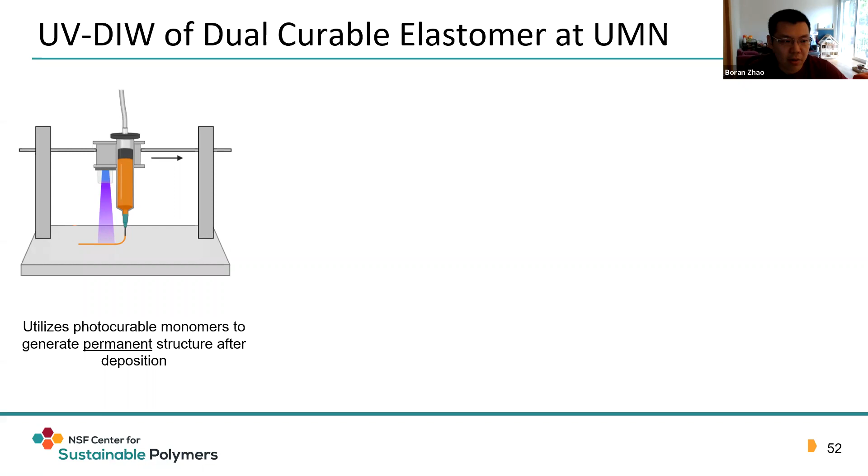Here's an example of the work done at UMN, from Professor Ellison and Professor Francis' groups. We developed a dual curable resin from acrylates and polyurethane. The green body is solidified by UV curing the acrylate component, and the polyurethane component is cured afterward in a thermal heating process. As shown here, we can generate fairly high aspect ratio elastomers, and depending on the different components of acrylate and polyurethane, the print could be as rigid as a solid body or as extensible as an elastomer—perfectly suitable for soft robotic applications.

That's the end of my section, and I'll turn it over to Professor Ellison.

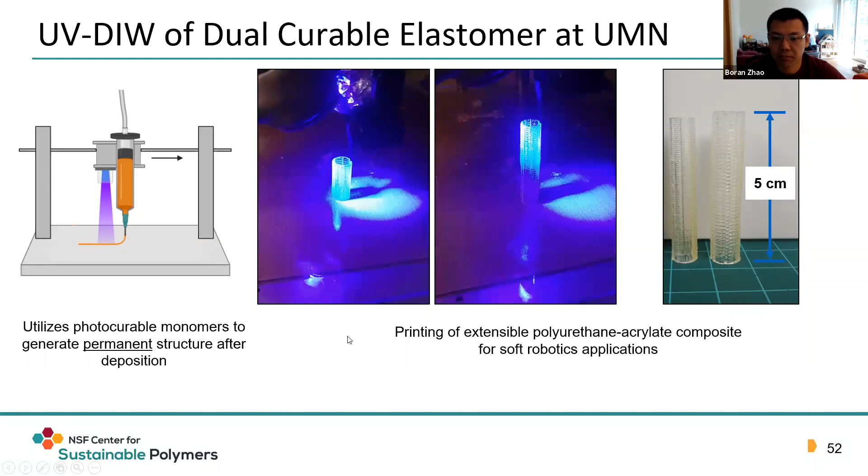Before I wrap up, I want to make a quick comment. Some of you may have seen Chris Macosko and myself chatting back and forth, but don't let the scale of some of the instruments scare you. Some indicate 500 grams is the scale you operate at, but there are really clever ways to inject a plug of active material—something with special chemistry or other special properties—into the continuous process, making a run with just a 50-gram plug that could be of interest to your research. So don't think you need 500 grams exclusively; there are ways to get away with smaller amounts.